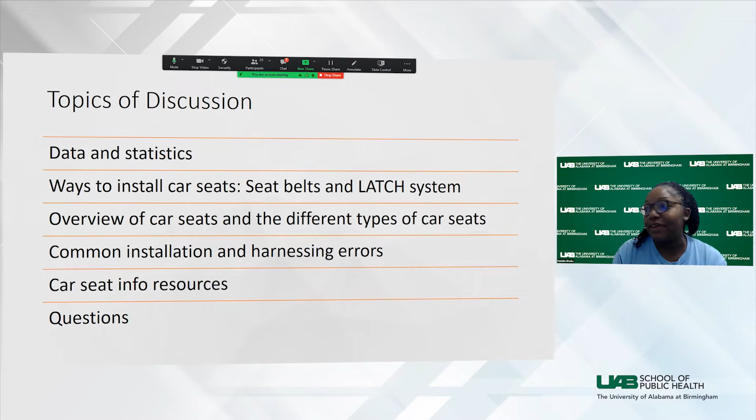So some of the things we are going to be discussing today: I'm going to start off with some data and statistics. Then I'm going to discuss the 2 main ways to install car seats, that's with seat belts and with the LATCH system. Then I'll give an overview of the different kinds of car seats - that's really going to be the bulk of this presentation. There's a lot of different types of car seats for different developmental ages, heights, and weights, so we're going to get into all that. I'll discuss some of the common installation and harness errors that we see, and I'll end with some resources, then open up the floor for questions. Feel free to unmute yourself if you have any questions or comments, because it is a lot of information. I'm going to try not to bombard and bore y'all. So here we go.

Okay, so I kind of touched on this already. At Children's of Alabama, we are the Health and Education and Safety Outreach Center. We are formerly Alabama Safe Kids, which is a coalition of Safe Kids Worldwide. We have 4 overarching umbrellas that we focus on in our department: transportation safety, home safety, school safety, and trauma safety. Myself and my coworker Jennifer cover the transportation safety umbrella. So these are some of the programs that we offer.

So we have our car seat clinic. In a pre-COVID world, we used to host our car seat clinic every other Tuesday in our parking deck. Parents could call our car seat phone line, and if their child was on some type of government assistance like WIC, Medicaid, food stamps, or All Kids, they could make an appointment with us and come in. They would get a brand new seat fresh out of the box.

We teach them how to harness the child in the car seat and how to install the car seat in their car. That's really a large part of our program before COVID. Unfortunately, we haven't had a car seat clinic in almost 2 years, and I hate it because we haven't been able to help a lot of people.

We teach CPST certification courses, so a lot of nurses, like in the NICU at Children's, and firemen at different fire stations across Birmingham will come to our classes to get certified. Our car seat line, as I mentioned, parents can call to make an appointment to come get a car seat. So that's just kind of an overview of our department. Everybody who works in our department is a child passenger safety technician, and they are either an instructor.

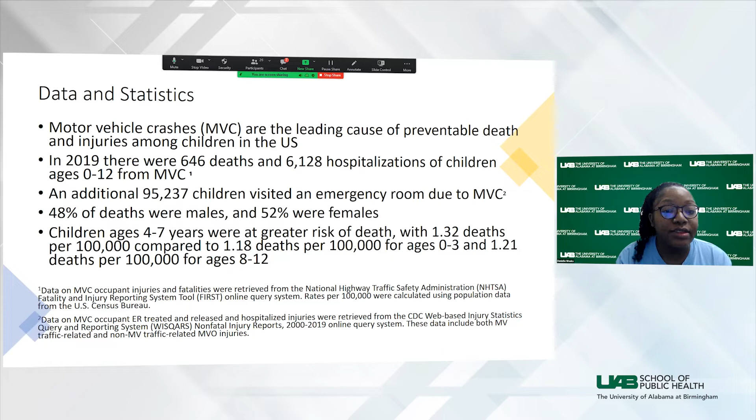In 2019, there were 646 deaths and 6,128 hospitalizations of children ages 0 to 12 from motor vehicle crashes, and an additional 95,237 children visited an emergency room due to motor vehicle crashes. The majority of the deaths were females, 52% female, 48% male. Children ages 4 to 7 had the greatest risk of death at 1.32 deaths per 100,000.

Some more statistics. I focus on passenger cars just because that's what children ride in majority every day. They had it broken down by trucks and buses too, but I just chose to focus on passenger cars. So in 2019, children less than age 5, there were 139 killed. There were 125 children killed between the ages of 5 and 9, and 194 killed between the ages of 10 to 15.

And when it comes to injuries, it's way more. So 23,000 children less than age 5 were injured in passenger cars, 32,000 children between the ages of 5 and 9, and 44,000 between the ages of 10 to 15.

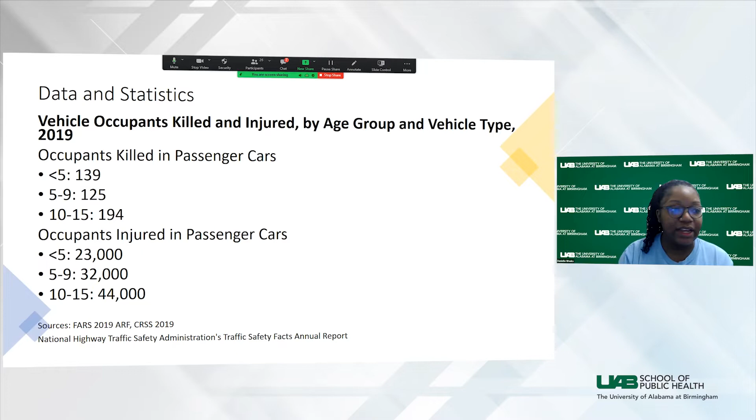More than 1 in 3 children who died as an occupant were unrestrained. On average, 3 children are killed and an estimated 487 are injured every day in the United States due to motor vehicle crashes.

Whenever a child seat is used correctly, it can reduce the death of a child by up to 71%. Whenever a booster seat is used correctly, it can reduce the risk of serious injury by 45% for children ages 4 to 8, when compared to those children being in just the seatbelt alone. We'll discuss later why children this age need to be in a booster seat.

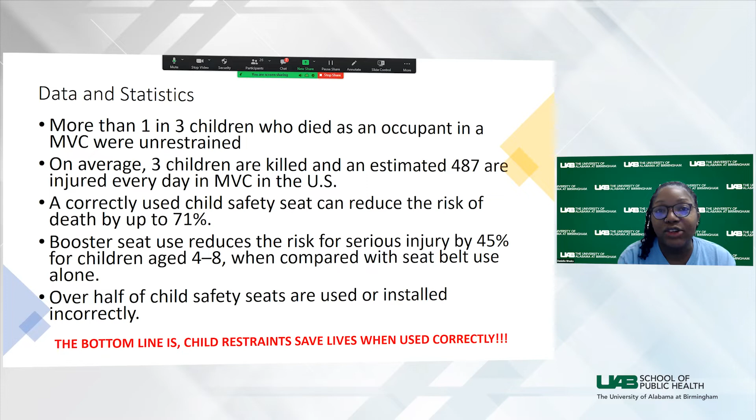And over half of child seats are installed incorrectly. So the bottom line of all these stats is that whenever child seats are used correctly, they can save lives.

Now we're going to go into the 2 main ways to install car seats. The way most people are probably most familiar with is with the seat belt. Whenever we install a car seat with the seat belt, that seat belt needs to remain locked at a fixed length, meaning it stays locked at that same length for the entire time the child is traveling in that car seat in a vehicle.

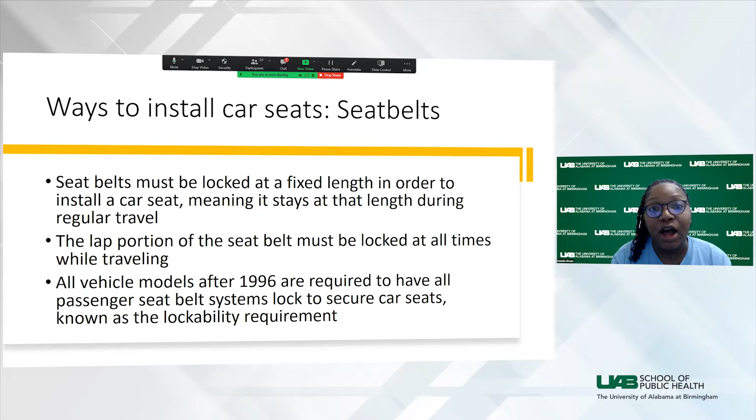The lap portion of the seatbelt has to remain locked at all times, and any vehicle made after 1996 is required to have seatbelts that lock. That is called the lockability requirement, and I'll get into that in a little bit.

There are 2 main types of seatbelts. First, the lap belt, or 2-point, because it offers 2 points of protection. It contacts the body at 2 places, one at each hip. It does not provide any type of upper body protection because it simply just goes across the lap.

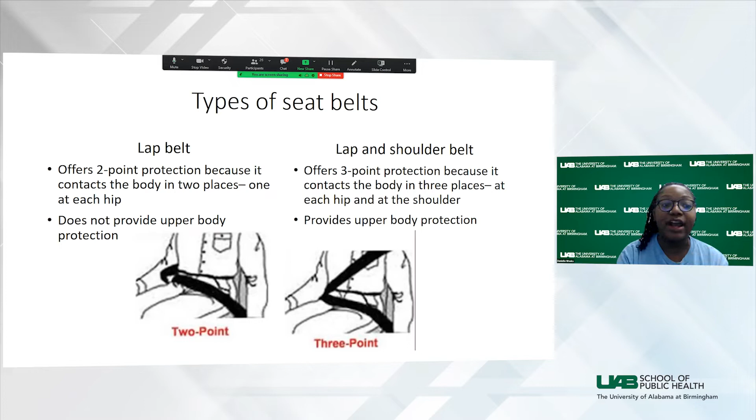Then we have a lap and shoulder belt, which is probably what most of us are most familiar with, what we use in the car every day. Hopefully y'all are using y'all's seat belts. It's called a 3-point because it offers protection at 3 points: the 2 points at the hip, and then an added point at the shoulder, which provides upper body protection.

So when we talk about installing car seats with the seat belt and getting the seat belt to lock, there is something called a retractor. The retractor is a part of the seat belt that we engage that is needed to secure the car seat into the car.

So there are 3 different types of retractors. The first is an emergency locking retractor, and it's exactly how it sounds - it locks in an emergency, anytime there's a sudden stop, acceleration, or turn. So let's say you get in the car, you're late in the morning, and you're trying to put your seatbelt on - you yank it real fast and it doesn't come out. That is the ELR doing its job, because it thinks there's some kind of emergency since you're jerking it so fast. It locks in the case of an emergency.

Automatic locking retractors are present more in older cars - we don't really see these as much in newer cars. With an automatic locking retractor, the webbing of the seatbelt has to be pulled out a certain amount, typically 12 to 18 inches, before the locking retractor engages. These can be tricky because you can pull it out and think it doesn't lock - we call that area the dead zone - but you just have to pull the retractor out a little bit more.

So the most important thing about retractors comes down to whether it locks or not, in order for us to be able to secure a seatbelt. An emergency locking retractor, you cannot use to install a car seat without an additional step. An ALR, you can use to secure a car seat, even though they're not as common anymore. I actually have a little video - it's a 58-second clip.

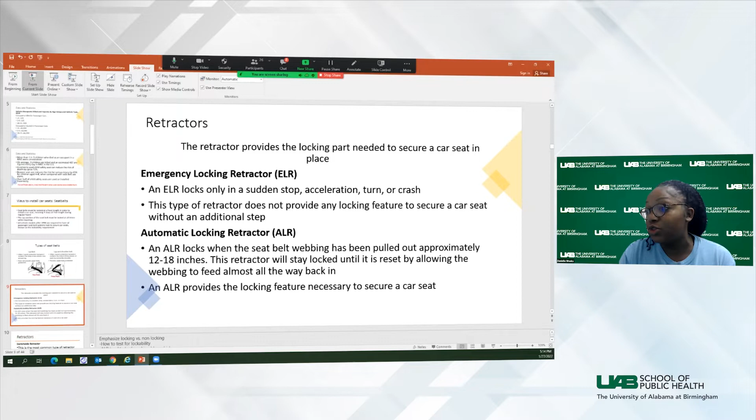So I found that video with a Google search, and it gives a real simple, thorough explanation of the difference between an emergency locking retractor and an automatic locking retractor. Can y'all see the slides again?

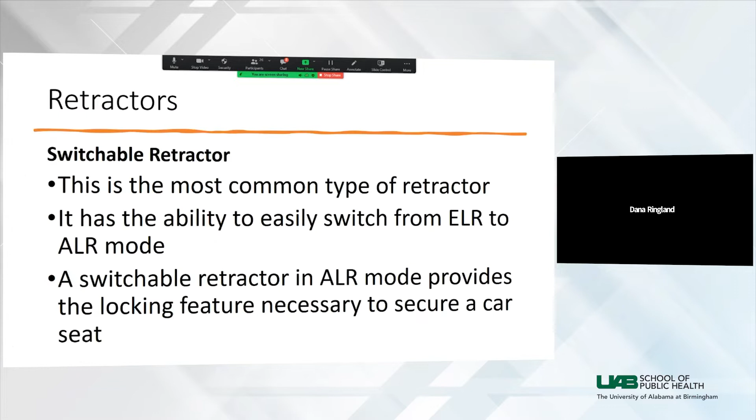Yes, okay, alright, so the last type of retractor is a switchable retractor, and it is self-explanatory - it's called a switchable retractor.

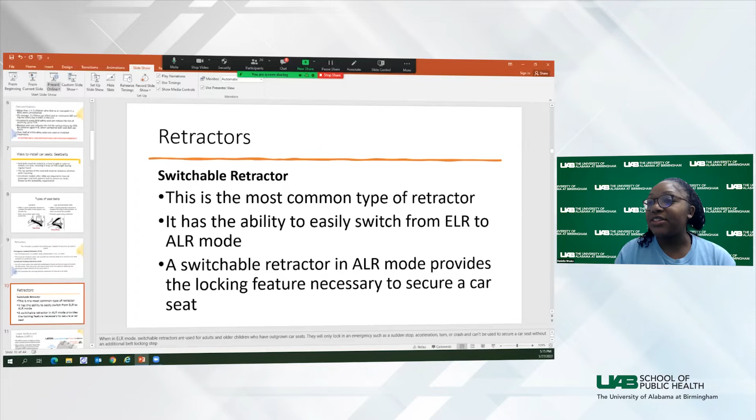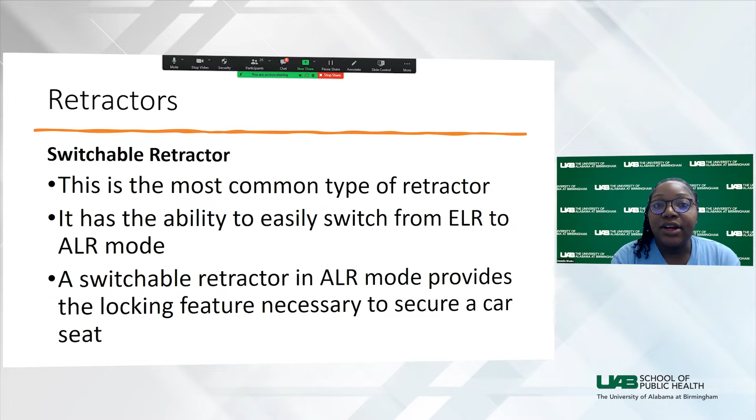Okay, so a switchable retractor is exactly how it sounds, because it has the ability to easily switch from emergency locking mode to automatic locking mode. This is the most common type of retractor - this is what is found in cars nowadays, especially in the back seat. And this does provide the necessary lockability in order to properly secure a car seat to the seat.

So the second method of installing car seats is the lower anchors, or the latch system, which stands for lower anchors and tethers for children. People have probably seen these symbols in their car, and if you don't have kids or car seats, you probably think, what the heck is that? That is part of the latch system. The system consists of 2 lower anchors, which are hooks located in the backs of the seats, and top tether anchors, which if you have a sedan, are going to be on that back shelf right in front of the back window.

So that is what the latch system is. Cars made after 2002 are required to have at least 2 complete latch systems. So if you have a newer car, you are going to have these latch in your back seat, or if you have an SUV, your second or third row.

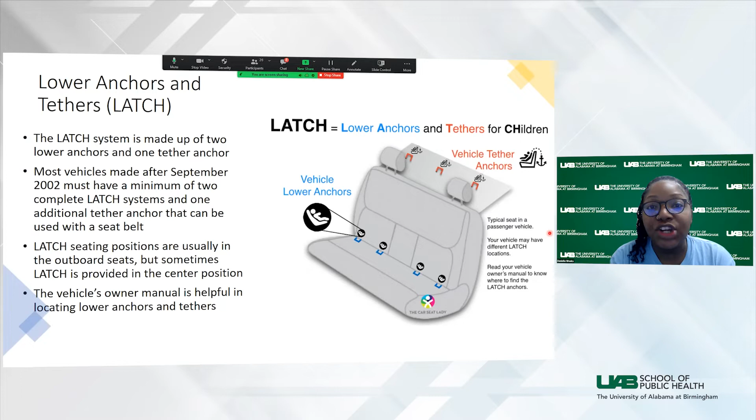Latches are usually located in the outboard seating positions. An outboard seating position is just the seating position that is closest to the window, whatever seating position is not in the middle. When in doubt, if you don't know where your lower anchors are located, always check your vehicle owner's manual. The first part of the latch system is these lower anchors.

As I said, those are these metal bars. There are lower anchor connectors, which I'm going to talk about in a few slides, that are on car seats, and that is what connects to these right here. They may be visible like they are here, you can clearly see these lower anchors, or they may be hidden by a door or some fabric. But if they are hidden, they will be clearly labeled with this little symbol right here, so you'll know that there are lower anchors located behind this.

The second part of the latch system consists of the tether anchor. This is more common on forward-facing car seats, which I will discuss a little bit later. This is what limits the forward head movement of a forward-facing car seat. Cars made after 2000 are required to have this latch, with a few exceptions, like convertible cars, large vans, and some school buses.

These are some of the locations where you might find the tether anchor. If you have a sedan, it'll be on that rear shelf. In a pickup truck, it might be on the back wall. If you have an SUV or a hatchback, it might be on the bottom floor of the cargo area, like the trunk. If you have a car that was manufactured before 2000, you can take your car to a dealership and get it retrofitted for the latch system.

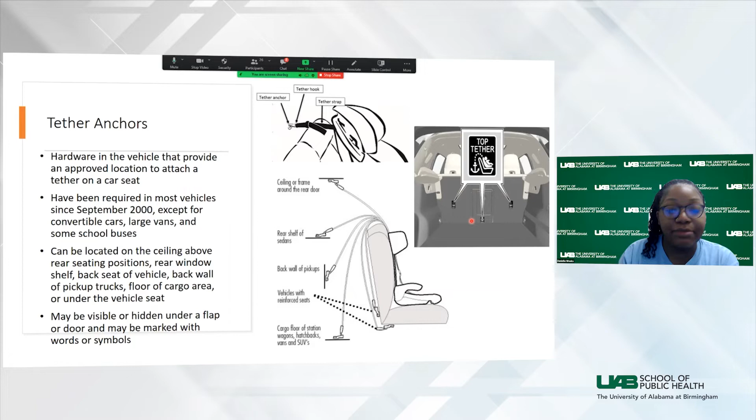So these are lower anchor connectors, which connect to those lower anchors that are in the seat back. There are two types of lower anchor connectors: we have rigid, attached to a metal frame, they are rigid, they do not move, you cannot adjust them. Or they may be flexible, you see here, attached to this webbing, and those can be adjusted.

You can use lower anchors rear or forward facing. Usually using the latch is easier rear facing. Sometimes we do install a forward facing seat with latch, but it's usually more common in rear facing.

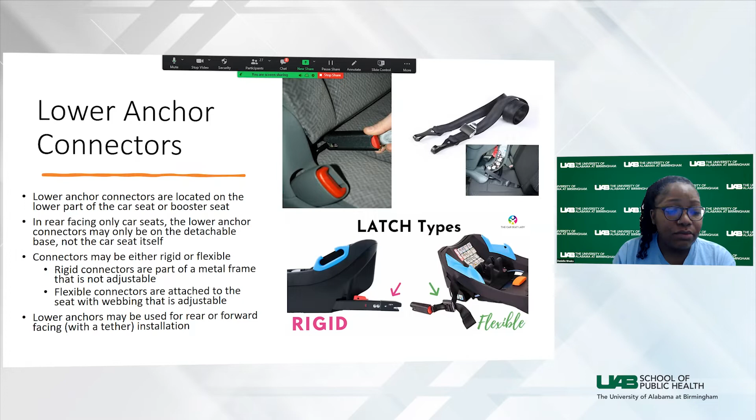Just a few installation tips to remember, especially when it comes to latch. The thing about the latch system is that there is a weight limit. You never want to install latch past a weight limit of 65 pounds, which is the combined weight of the child and the car seat. So if your car seat weighs 20 pounds and your child is 40 or 45 pounds, using latch might not be the best, because they're going to be right there at that top end of the weight limit.

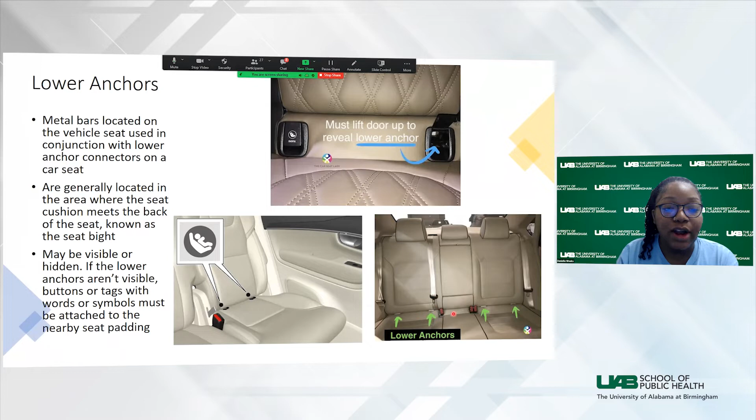Whenever you want to install the latch, particularly in the middle seat, you always want to check the car seat manual and the vehicle owner's manual to see if you can borrow latch. So what I mean by borrow: let's say you want to put your baby's car seat in the middle seat. You might think, oh, I can use this latch from this seat, and then use this latch from this seat. But that might not always be allowed. So we always say check the vehicle owner's manual and the car seat manual to see if you are allowed to. That's what we mean when we say borrow, when you're using lower anchors from two different outboard seating positions.

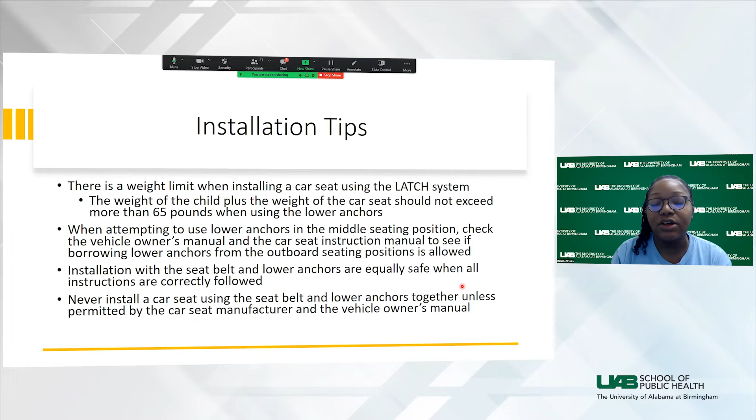This is something we see all the time, and when we tell parents, they're shocked because they think it's double the safety. You never install a car seat with the latch and the seat belt together—it's either or. They're both equally safe; one is not safer than the other. But parents think, oh, I did it with the latch and the seat belt, double protection. No, no, no. There are maybe a handful of seats where that's allowed, but typically it is not allowed to install with both the seat belt and the latch. So as we always say, check the vehicle owner's manual and the car seat manual.

Now I'm going to get into the bulk of my presentation: what is a car seat? This is the textbook definition. A child safety seat, car seat, child restraint—they're all interchangeable terms. I'll use car seat since that's most familiar. It's a device that has been crash tested and specially designed to provide protection for an infant or child in the event of a motor vehicle crash. There are different types of car seats that vary for different age, weight, height, and developmental levels of the child. A correct car seat is one that fits within the child's age, weight, and height, with age and weight being the two most important factors.

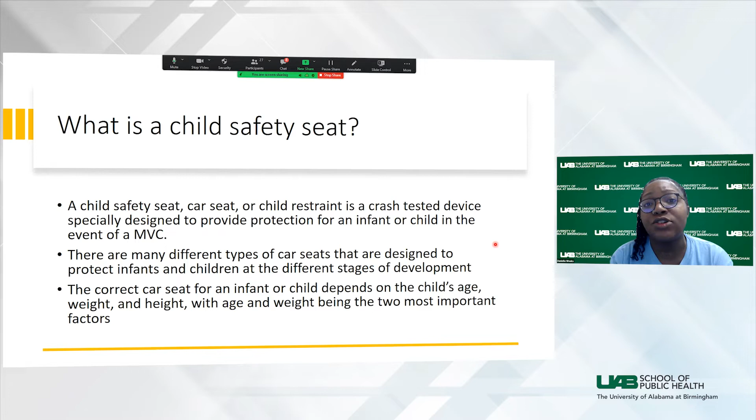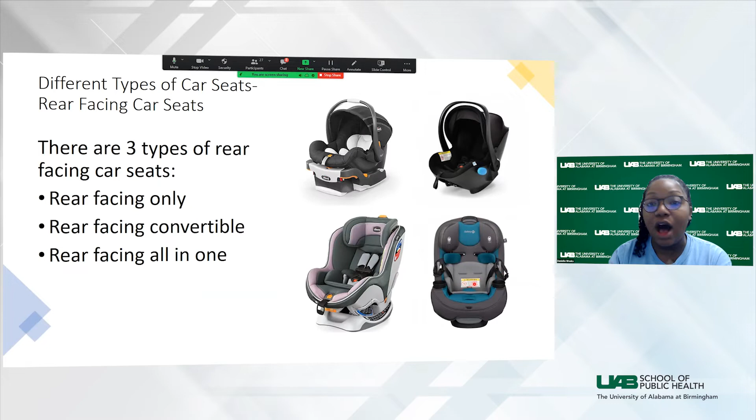The first type of car seat I'll discuss is a rear-facing only car seat. I'm sure everybody has seen these. We have a rear-facing only car seat with the base, and one without the base. A rear-facing convertible is this seat right here—it can be used rear facing, then converts when the child reaches the maximum weight and height requirements, and can go forward facing. Then we have a rear-facing all-in-one, this seat right here. It can be used rear facing, then turned around and used forward facing, and then you can remove the harnesses and use it as a booster. It's every car seat in one—it lives up to its name, literally all in one.

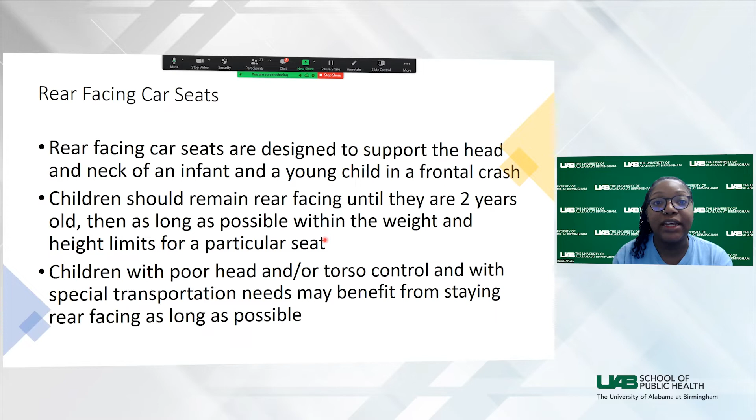The most important thing about rear-facing car seats, especially for newborns and infants, is head and neck control. Babies have no control of their head and neck, but as they grow, they gain more control. Keeping them rear facing is important because it supports their head and neck in the event of a crash. We preach that children need to remain rear facing until they are 2 years old, or as long as possible within the weight and height limits of the seat. Children with poor head and torso control—like those with muscular dystrophy, or who are premature and lagging developmentally—could benefit from staying rear facing as long as possible, because it gives them the extra head and neck support they need.

There are some steps we use when using rear-facing car seats. The first step is selection—choosing the right seat. This means choosing the seat most appropriate for that child's height, weight, and developmental level, and one that fits into the caregiver's vehicle. Car seats are not one size fits all. We've been in plenty of car seat clinics where it's like a puzzle trying to figure out where it fits, or the parent has two or three different seats and we're trying to install in the back of a Camry—it really is like trying to figure out a puzzle.

So just whatever car seat fits best in the vehicle, you need to select a seat that you can use correctly every time, especially if it's a seat that's going to be moved from mom's car to dad's car to grandma's car. The caregiver needs to be able to use that seat correctly every time, so installing it, reinstalling it, adjusting the harness, anything. Just select the seat that the caregiver feels most comfortable using correctly every time.

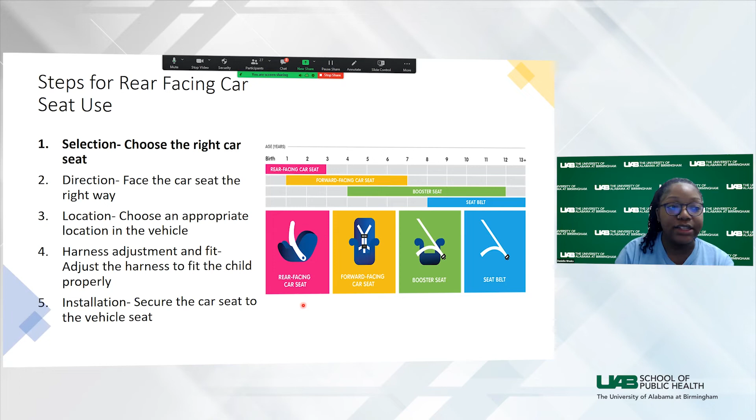The second step is direction. As we preach, a child needs to stay rear facing until they reach the maximum height and weight limits defined by that particular seat. Any infant under the age of 1 needs to be rear facing regardless. It drives me crazy because I've seen people with 8-month-old babies forward facing, and I'm like, oh my God, no. There are a lot of states with laws that define how long a child should be rear facing. Here in Alabama, a child can stay rear facing and go forward facing when they are 1 year old or at least 20 pounds.

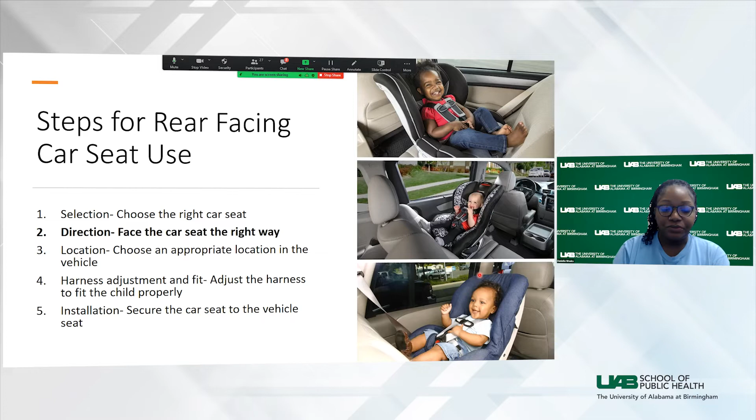The next step is location. You want to choose an appropriate location in the vehicle. Whenever you're deciding where to install the car seat, you always want to install it in a seat that faces the front. I feel like this isn't as relevant anymore, but in the 60s or 70s there were those seat positions that could swivel around and face the back. I never understood the point of that anyway, I feel like that would make me super car sick. But the point is, you never want to install a car seat in a vehicle seating position that does not face the front of the car.

You never, ever want to place a rear facing only car seat in front of an airbag, like in the driver's or passenger seat, because that will kill or severely injure a child in the event of a motor vehicle crash, if that airbag was to deploy.

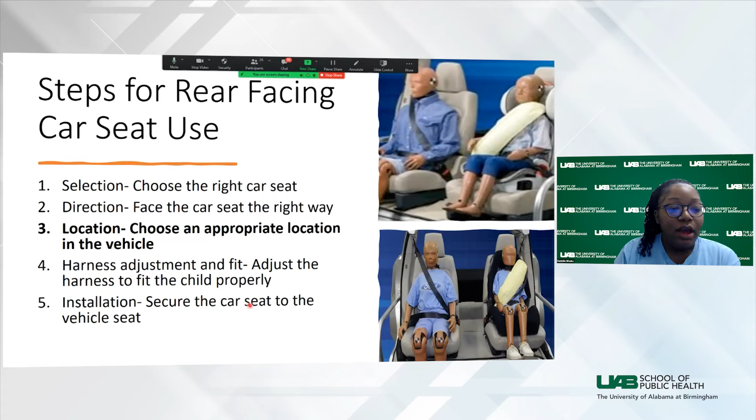So what we tell parents at our car seat clinic or any event that we have is you want to place the child with their butt all the way to the back of the seat. And one of the most important things about rear facing is the harness. Whenever we have a child that is rear facing, their harness strap should be at or below their shoulders. So wherever the harness enters behind their back, it needs to be in a position that is below their shoulders.

We want to place our chest clip at armpit level. So never down on the baby's soft tummy. You don't want to put it up here either, that'll be too close to the baby's neck. Always, always, always at armpit level.

This is really relevant, especially with it being so cold outside. I know a lot of parents want to keep the big bulky jackets or blankets on when they harness the child in. So anytime you harness the child in, you want to take off any blankets, any extra layers, because that harness is not going to fit on the child as it should with that big bulky jacket on.

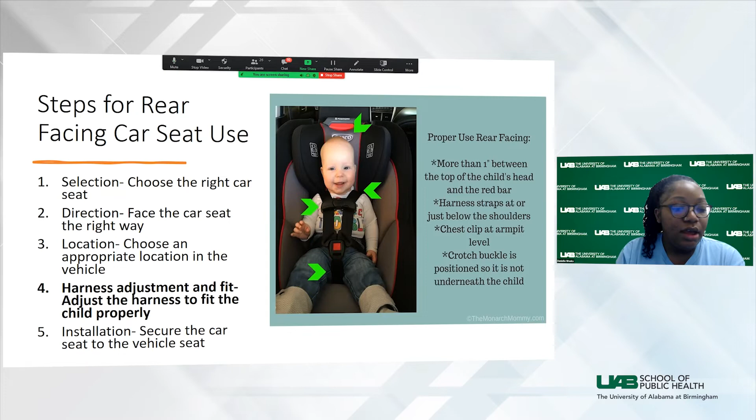Okay, and our last step is installation. So there are a lot of steps that go into installation. I wasn't going to go into all that detail, but the most important thing about installation with rear facing is we always want to make sure...

Wherever the seat belt or the latch webbing belt path is, we tell parents you want to take your non-dominant hand. So I'm right-handed, so I would take my left hand and put it at that belt path, and I'm going to pull from side to side. That car seat should not move more than an inch from side to side. If it moves more than an inch, then we need to go back in and tighten it up until we have less than an inch of movement. That's how we know our car seat is installed correctly in the vehicle.

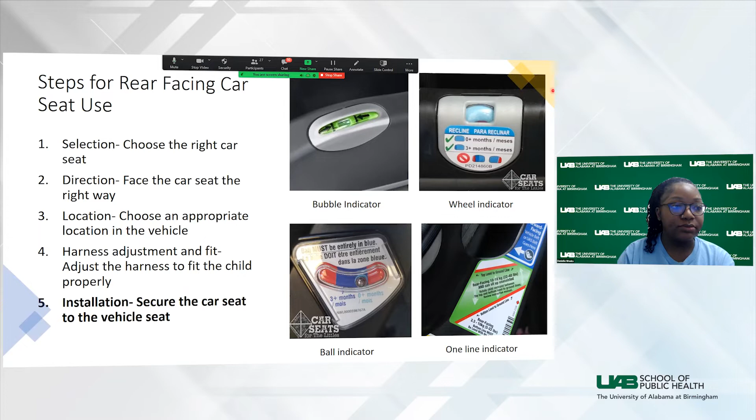And I mentioned this earlier, the chest clip needs to be at armpit level. We don't want it to be too low because then it's on that baby's soft abdomen, with no kind of protection there, or it's too high, too far up on the baby's neck.

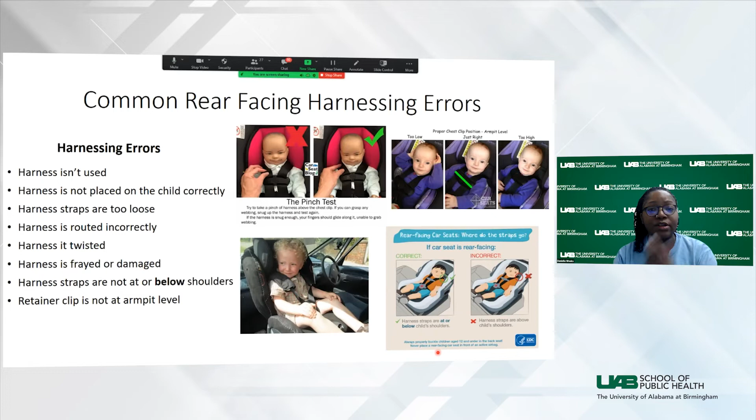And the harness straps are above. You see right here, these harness straps are entering below this child's shoulders, versus here, you can clearly see they're entering above the child's shoulders. So these are just some of the most common harnessing errors that we see when it comes to rear facing.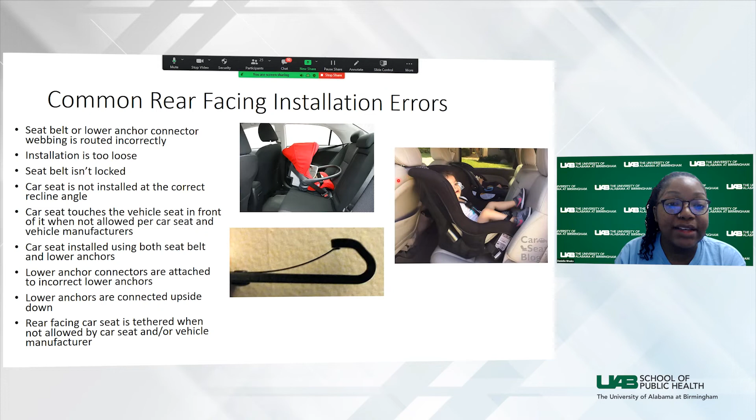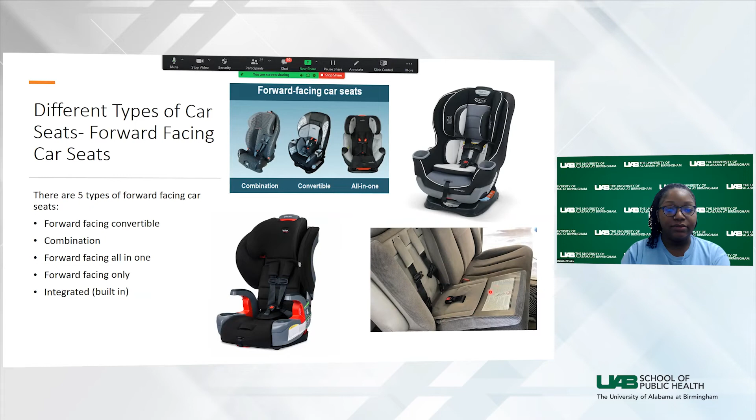So parents are always curious, especially, you know, if their child turns 2, they're always eager, like, well, I want my child to be forward facing. A lot of times it's just so they can see the child, or parents are concerned about their child's legs being kind of scrunched up against the back of the seat. So we have this good, better, best practice when we talk to caregivers about deciding if it's time for them to move their child from a rear facing seat into a forward facing seat.

So this is good. Okay, so our child, let's say we have a 2-year-old and they're 35 pounds or whatever it may be.

So they are at the minimum age, weight, and height requirements for a forward-facing seat, but they're also still meeting the height and weight limits for their rear-facing seat. So, yeah, that's good, we can turn them around. That's fine, so we have better.

So they are within the rear-facing weight and height limits of their car seat as allowed by the manufacturer, but they also are within the forward-facing age, weight, and height limits of the car seat. So technically they meet both requirements, so that's better to turn them around. But best practice is to keep that child rear facing until they reach the maximum weight or height limit allowed by the car seat manufacturer.

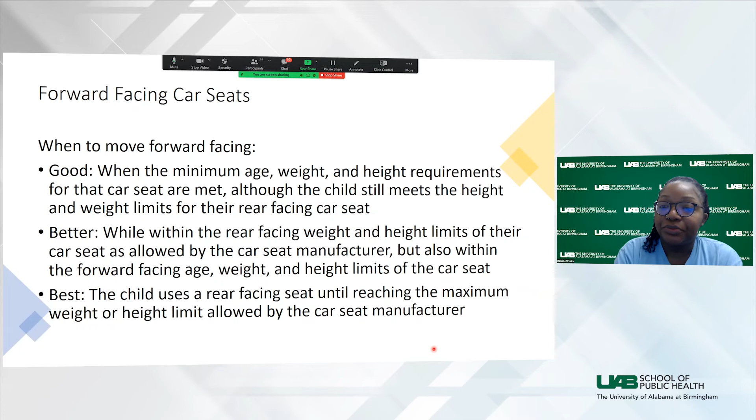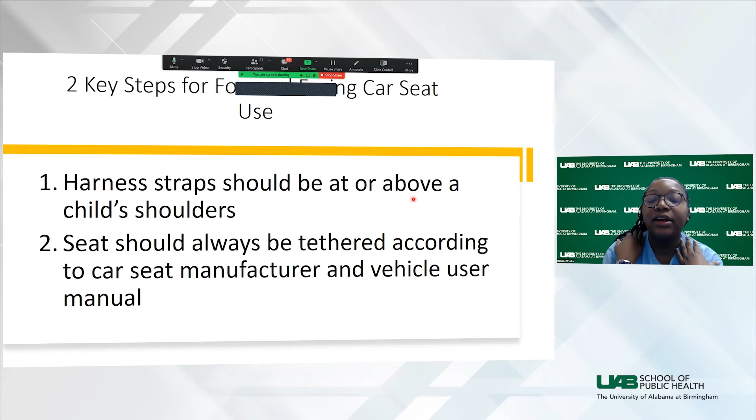So the steps for using forward facing car seats are the exact same as rear facing. There's just two key differences. The first is that harness strap. As I mentioned before, whenever we are rear facing, our harness straps need to be at or below the child's shoulders. But when the child turns forward facing, their harness straps should be at or above their shoulders.

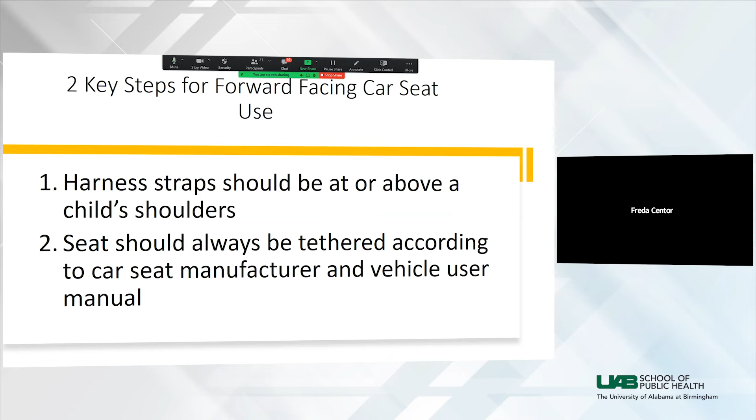Basically, their harness straps should fit how our seatbelt does, entering above our shoulders. That is how their harness straps need to be when they get moved forward facing. And the second difference is that whenever you use a forward facing car seat, it always needs to be tethered according to the car seat and vehicle user manual. The point of tethering forward facing car seats is to limit the forward movement in the event of a motor vehicle crash.

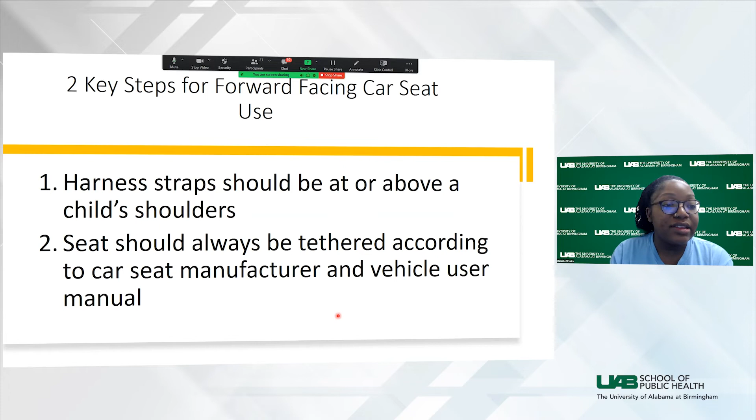Using the tether can limit that movement by 4 to 6 inches. So like I said, all the steps are the same. These are the 2 main differences.

A lot of the errors that we see in rear facing are the same, like the belt is routed in the wrong place, the harness is frayed, it's twisted. But the main difference we see when it comes to harnessing between rear facing and forward facing is that those harness straps are not above the child's shoulders—they're still being used below the child's shoulders.

A lot of the installation errors are also the same, but the most common installation error we see between rear facing and forward facing is the tether. Either the tether is not used, or the tether is misrouted—so instead of it being underneath the vehicle headrest, it's going above it, or whatever, if it's not supposed to be like that.

And sometimes the tether is the only thing the car seat is installed with—sometimes the seat belt isn't even used, it's just tethered. And we're like, oh God, that is offering no kind of protection. So these are some of the most common errors that we see with forward facing.

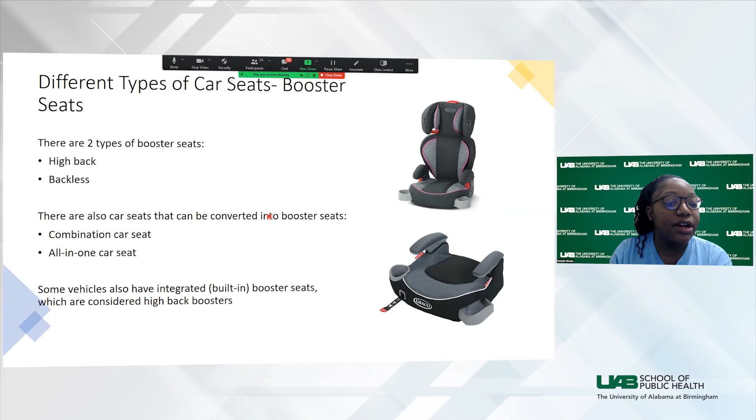So the next type of car seat is a booster seat. There are two types of boosters, real simple, real straightforward: we have our high back, self-explanatory because it has a high back, and then our backless, where there's no back. And then we have, as I mentioned before, our combination car seats and our all-in-one car seats. They can go from rear facing to forward facing to booster, or from forward facing with that 5-point harness, and then you can remove that harness and use them in booster mode. We also have, just like those integrated seats with forward facing, some integrated booster seats.

So booster seat is in the name. The point of a booster seat is to help boost the child up correctly so that the seat belt fits them as it should. Seat belts were not designed for children, they were designed for adults. That is why if you move a child into a seat belt too early, that seat belt is not going to fit them correctly, because it's not designed to fit their little bodies yet.

A booster always needs to be used with a lap and shoulder belt. I'm going to harp on this—you're going to hear me say this again. Always, always, always use a booster seat with a lap and shoulder belt.

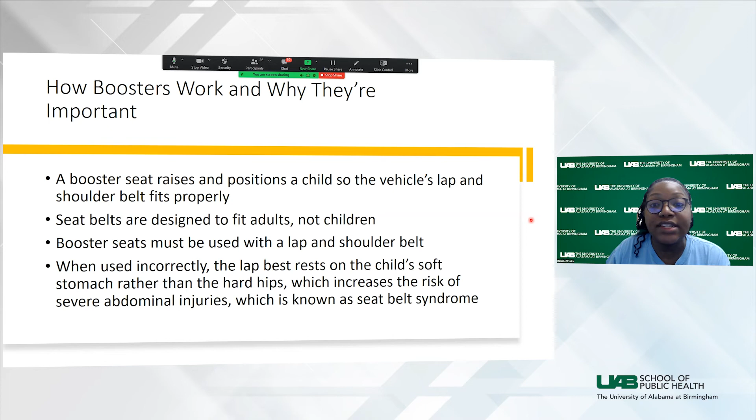So whenever we have a child who's not in a booster and who's just sitting in the car seat, that seat belt is not designed to fit them. Instead of the lap belt portion being across their hips, it's up on their stomach, and that can increase the risk of severe abdominal injuries. That's something called seatbelt syndrome, which I'll touch on in a little bit.

High back boosters are great because they provide head, neck, and back support for the child. This might be an easier transition for children because it's a similar environment to what they're used to riding in with a rear facing or forward facing car seat. The only thing missing now is that tether. So this might ease the transition for some children going from a forward facing seat to a booster. Some high back boosters let you take the back off and use them as a backless booster.

This is another example of a backless booster. Whenever you use a backless booster seat, or a high back booster with the back removed, that child always needs to be in a seating position that has a head restraint, because they don't have the head and neck support that a high back booster offers. The seat headrest provides that support they need.

This little thing right here comes with a lot of backless boosters. It's called a shoulder belt positioner. You use that if needed to make sure that the shoulder belt is actually on the child's shoulder and not up on their face or neck or anything like that.

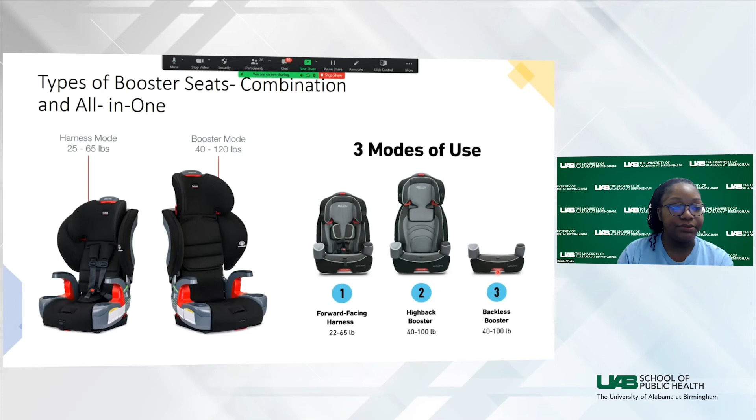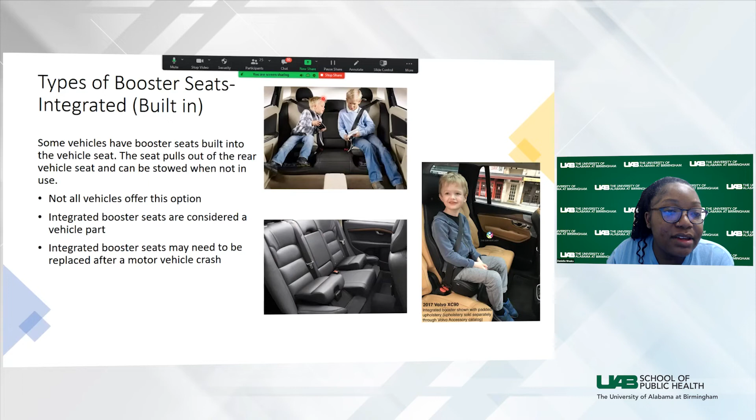These are some examples of integrated booster seats. They're built into the vehicle and considered a part of the vehicle. Not all vehicles offer integrated booster seats. Currently only 2 car manufacturers even offer these, Volvo and Dodge. Volvo has them in about 6 of their models, the XC90 being one, and Dodge only offers it in select models of the Journey. These aren't very common, so unless you have a certain Volvo model, but it's literally just this little part that pulls out. It helps boost the child up, and then you just buckle the seatbelt into them. It offers them head and neck protection because, as you see here, it has the vehicle headrest giving them that.

So the steps, once again, for choosing a booster are the exact same selection process. Just choose the right booster seat that is most appropriate. What we tell parents is children do not need to be moved into a booster seat until they are 4 years old and 40 pounds. So 4-40, 4 years old, 40 pounds, before they need to be in a booster seat.

There's also a few other factors, like if your child is an escape artist and you know they're going to be unbuckling the seatbelt and getting out of the car, it is perfectly okay to keep them in that 5-point harness until they outgrow it, the maximum weight limit of that 5-point harness.

Direction is self-explanatory. A booster seat is always going to be used forward facing, never rear facing. Location is pretty much some of the same things. It needs to be in a seating position that faces forward. Just check the vehicle owner's manual and the car seat manufacturer manual to make sure it can be installed in a seating location that has those inflatable seat belts.

And I lost my train of thought. I'm sorry. Okay. Yeah. So just check the vehicle's owner manual to make sure it can be installed with an

Check the vehicle's owner manual to make sure it can be installed with an inflatable seat belt, and adjust accordingly. The purpose of a booster seat is to boost the child up to make sure the seat belt fits them correctly. You want to adjust the booster seat to ensure the child's head and ears are protected, whether by the back of a high-back booster or by the vehicle headrest.

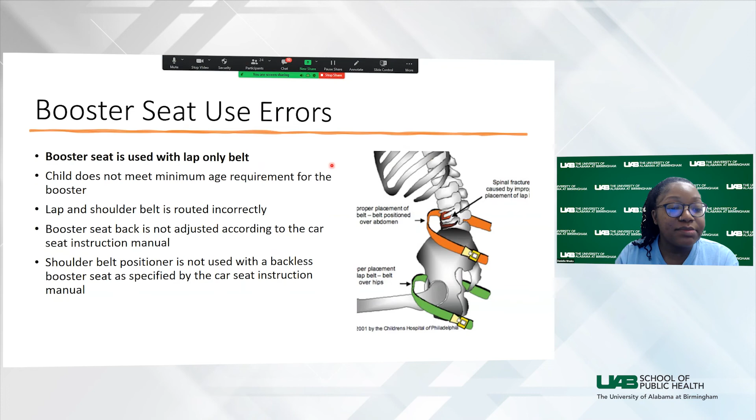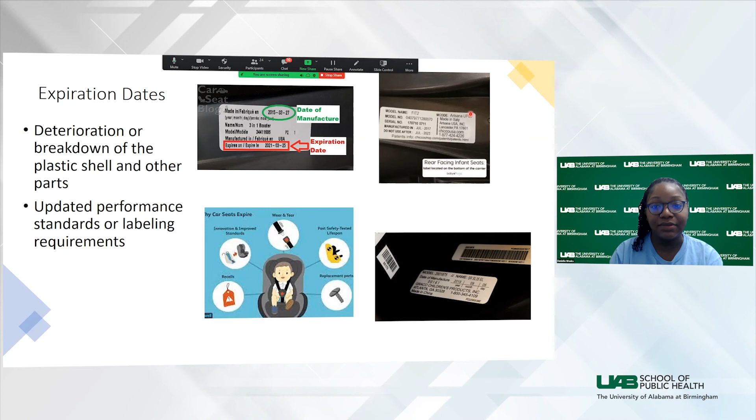So basically, I'm going to demonstrate. The child needs to be able to sit all the way in the back of the seat. Their feet need to be flat on the floor. Their knees need to be bent over the seat bench. And they need to be able to sit like this without slouching or bending over. If they can sit like this and the seatbelt is over their lap and correctly over their shoulder, they're ready for a seatbelt.

Like I said, if any of these are no, the child is not ready for a seatbelt.

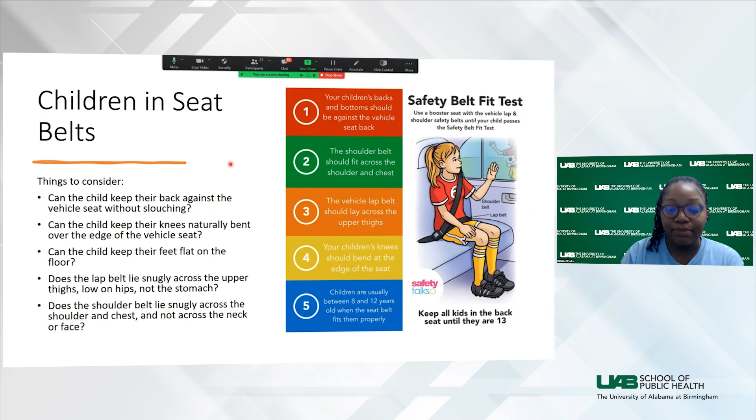So just a few reminders when using seatbelts. A lot of big kids, especially when they get out of a booster seat, think they can ride in the front seat now. Children need to stay in the back seat until they're 13 years old. And remind them they never want to lean on a place where there's an airbag, because in the event of a crash, that airbag is going to hit them.

And you always want to make sure the child takes their backpack off before they get buckled in.

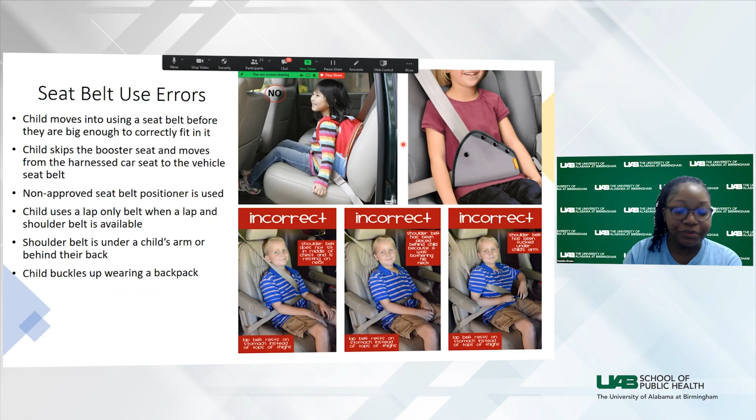The National Highway Traffic Safety Administration, or NHTSA as we call it, that is a great resource. This is under the Department of Transportation, so it's a federal organization. Car Seats for the Littles is a nonprofit organization that is run by child passenger safety technicians. The Car Seat Lady is actually a mother-daughter duo.

One is a nurse and one is a doctor. They're both certified child passenger safety technicians. They teach and are very well versed in car seat knowledge. The CDC has a child passenger safety section where you can go and get all kinds of information on car seats and booster seats. And carseat.org is a nonprofit organization dedicated to child passenger safety.